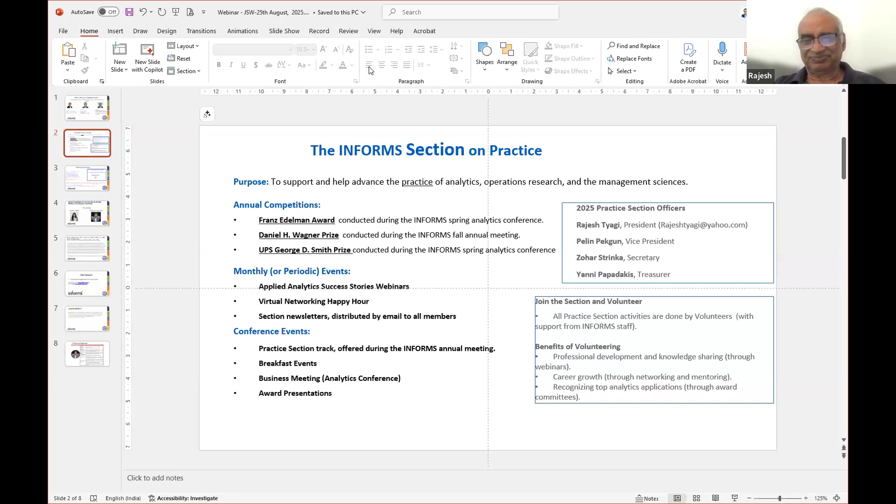Thanks, Rajesh. So we have started this OR practice core team, ORSI practice core team, which is a mixture of academicians and practitioners, primarily with a practice focus. We have several people in our team, now about 22 people, with myself as ex-IIMA retired faculty, and I have worked in Tata Steel long time back.

Then you have Sanjay Kumar Prasad, Dr. Siddharth Sengupta, ex-TCS and IIT Bombay, Sankarsan Basu, ex-ICICI and IIM Bangalore faculty, Bodha Ramkumar from Swiggy, Sundaravalli Narayanaswami, IIMA faculty currently, and Sumita Sharma.

We have started this practice prize competition, an event which we actually do at IIMA every year. Last year we started jointly with IIMA, before that we had done it only with ORSI. So IIMA, ORSI, Center of Data Science and Analytics of IIMA and ORSI do this national practice prize competition. This year we received 19 entries, out of which 6 will be selected. The selection process is going on, so I cannot tell anything more about that. But the final selection process will happen on 11th January 2026 at IIM Ahmedabad.

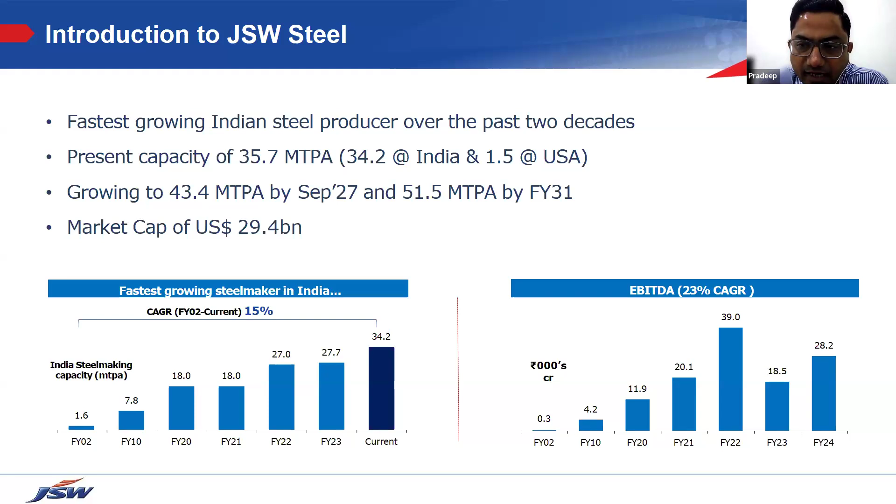About JSW Steel: it is a fast growing steel producer with a present capacity of 35.7 million tons per annum, the largest steel capacity in India by an integrated steel maker. We also have a plant in the USA with a capacity of 1.5 million tons. We plan to grow to 43.4 million tons by September '27, and 51.5 million tons by financial year '31. Present market cap is $29.4 billion. It's a large organization, so whatever small change we make in the process—even if we save just 1 rupee, multiplied by 10 million, that's a saving of 1 crore rupees yearly. So we talk about very small improvements, digitizing to get standard benefits, and the benefits are huge because of the volumes.

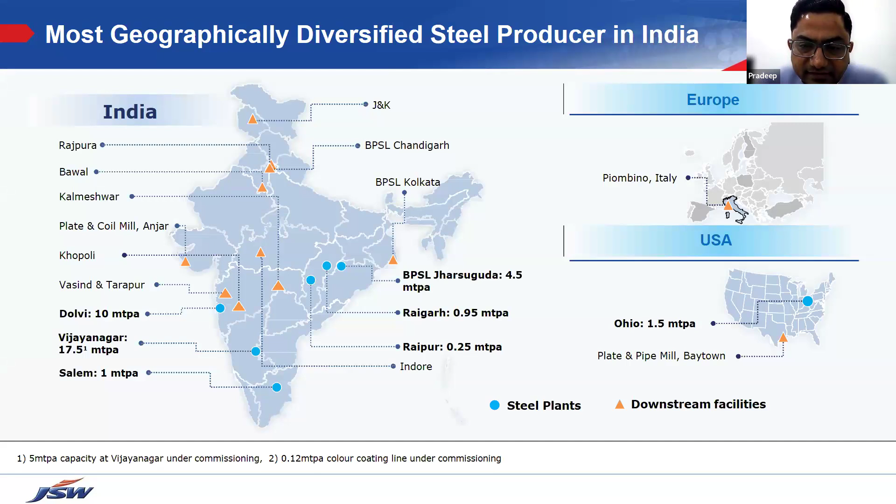Steel, now we have 6 integrated steel locations across India and 1 in USA, which is in Ohio, where we use raw material to produce steel product. And then we have downstream locations, more than 10 across India, to produce downstream products like cold rolled steel, coated steels, electrical steel, etc. So we are widespread across India, and globally we have mines and availability, our presence is there.

Steel is a basic commodity where we make multiple types of finished products. Our finished product is mostly the raw material for other industries, such as appliances to make the appliance, automotive to make the car bodies. So we produce the base steel and they in turn use it to make the final application. We are supplying steel to almost all known applications of steel, such as infrastructure construction, bridges, roads, consumer durables, pipe tubes.

Different types of steel products are also there in flat product and long product. Flat products like hot rolled plates and coils, cold rolled sheets, etc. Long product typically includes wire rod, TMT. So we are manufacturing all kinds of products which are used in turn by the secondary industry to make the end components.

As I said, making small changes gives a huge benefit, and digitization has helped us a lot. Now we are the lowest conversion cost steel industry across the globe. World Steel Dynamics has recognized this. This has been possible by continuous digital intervention in many of our processes involving manufacturing, supply chain, mining, sales, marketing,

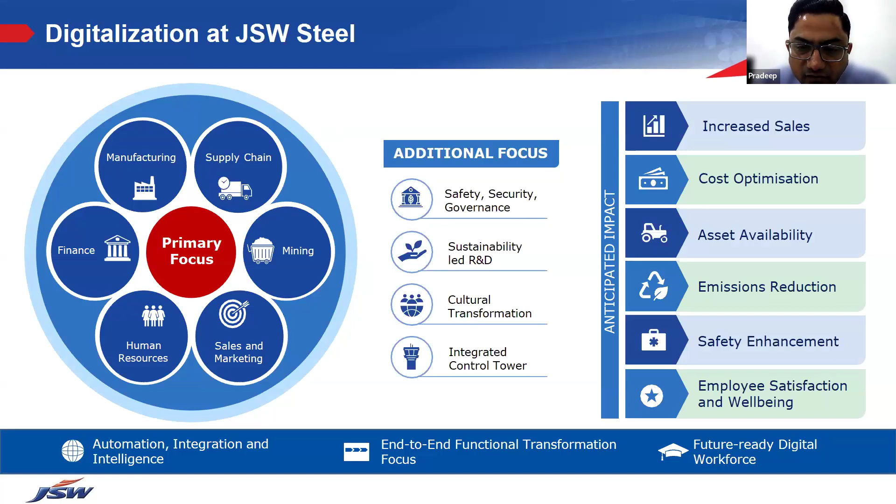human resource, and finance. We have a vision to go to Industry 4.0, where, although it is a labor intensive industry, our objective is to make it more smooth and sustainable and have a visualization for faster and smooth decision making. So we have made small cells for improving or introducing digitization in every activity we are doing. The major focus is on automation, integration, and intelligence, end to end functional transformation, and being future ready for the digital workforce.

Coming to the project focus, now we will talk about the business challenge. Before talking about the business challenge, I will introduce how the steel is manufactured.

So first, we have raw materials. For us, the raw material is iron ore. To produce steel from iron ore, we use coal and coke. They are the reducing agent. Iron ore is something like iron oxide, and we need to remove this oxide from the iron by melting. So this fuel acts in two roles: one is to give us heat, and second is to reduce that iron ore to iron. Then fluxes are added to get the desired composition and activate this process.

So these raw materials first get beneficiation to upgrade the quality, because nowadays in India we are not able to find very high grade iron ore. So we have to use low grade iron ore by putting it through a process where we upgrade the iron value and get the desired concentrate or agglomerates. Agglomerates are like pellets and sinters. These agglomerates are then charged into iron making units.

There are two types of iron making units, Corex and blast furnace. Blast furnace, being our largest unit, gets the feed of pellet, sinter and coke with the fluxes. Then it melts everything, separates out the oxide in the slag, and metal is made. We call it hot metal. Now this hot metal goes to the steel making unit, which does hot metal pre-treatment to remove some of the impurities.

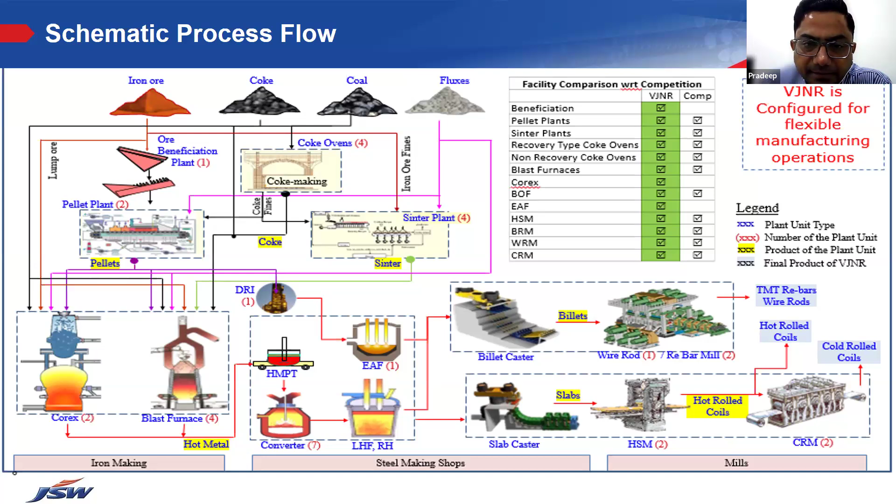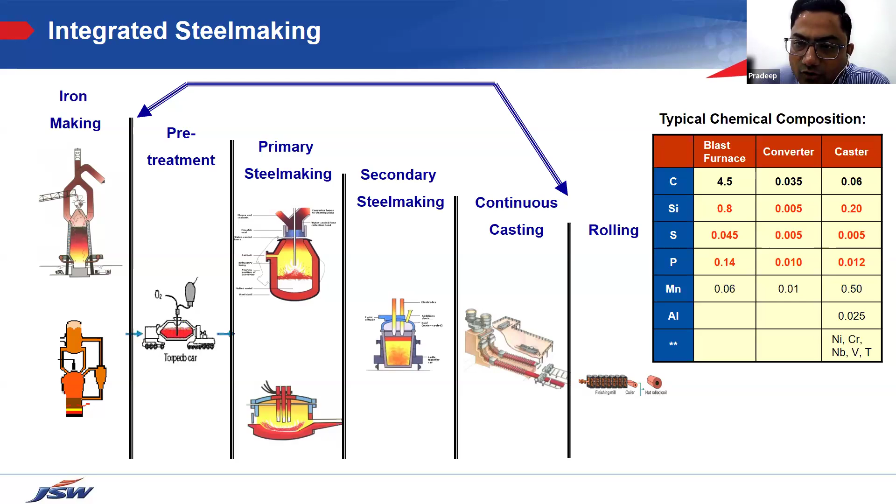We put lot of oxygen in flow and then we burn this silicon into silica by the same oxygen. We reduce the sulfur and phosphorus by adding additives and fluxes, and manganese is also reduced. After that, in the caster, which is the final steel making process, in between converter and caster we add ferroalloy to get the desired composition.

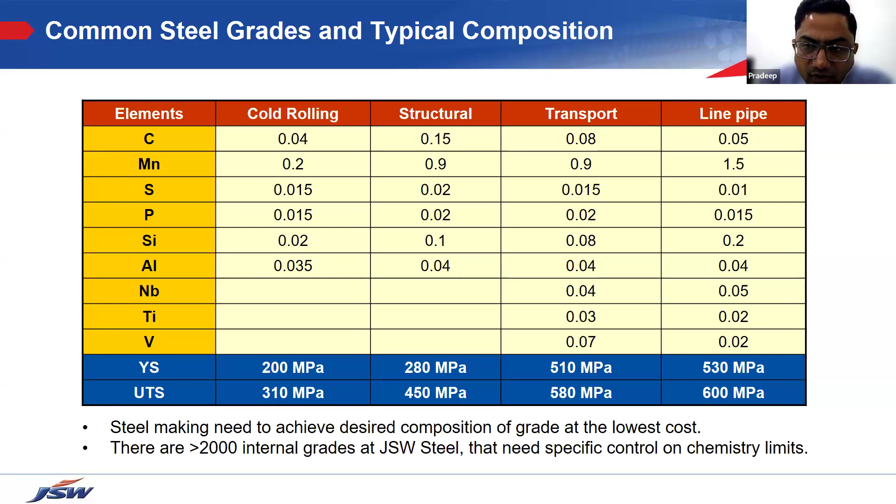Based on the final product requirement, let's say we have more than 2000 internal grades which have specific chemistry requirements. So for each specific chemistry requirement, there is a different combination of ferroalloy that we charge. For example, 4 types of product: one is cold rolling, where we need low carbon, low manganese, so less amount and low strength. Ultimately, the purpose is to get either the desired strength or a desired functional property in the finished product, and accordingly the chemistry is decided. This is an example of how chemistry and strength are linked. If we boost the chemistry higher, typically the strength goes up and we need more ferroalloy. So depending on the grade requirement, the ferroalloys are being added.

Now why do we need a model? For each ferroalloy there are multiple options. For example, we can get the same manganese of 0.1% if we charge low carbon ferromanganese, medium carbon ferromanganese, metallic manganese, high carbon ferromanganese or silicomanganese. So the operator has the option whether he wants a high cost material or a low cost material. For the same 0.1%, if he uses high carbon ferromanganese, the cost is only 131 rupees for each 0.1% chemistry addition, while if we use metallic manganese, the cost is 269 rupees. So the selection of the right ferroalloy based on given operational conditions is a must requirement for overall optimization of the ferroalloy cost.

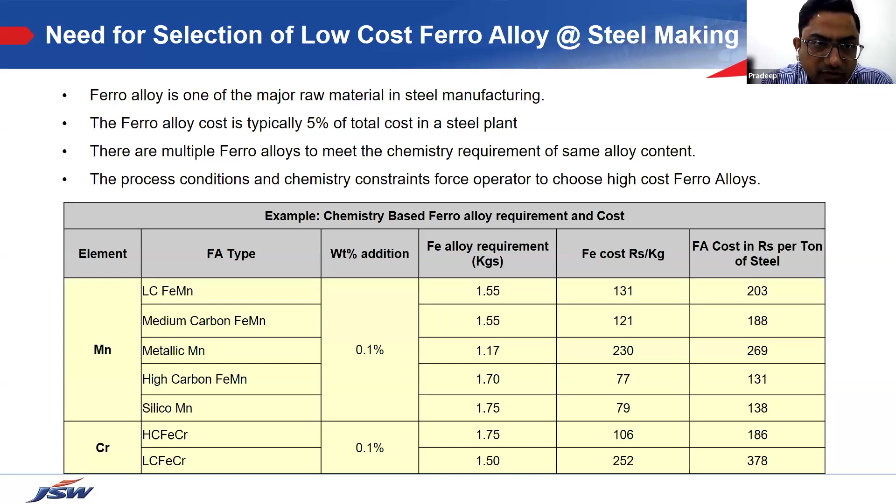This model talks about how we optimize this. Since steel making is an ancient process, people have been doing this, so mostly it was driven on an experience level. Now we are having a data driven process to have automatic selection for the method of adding ferroalloy and sequence. So this is about the basic overview.

Earlier also there was some optimization, but what we have done now is we have integrated the optimization across the value chain. For example, if we have a lot of variation in the raw materials which are iron ore, coal, coke, etc., this variation gets transferred to the hot metal, leading to large variation in hot metal chemistry. So one of the challenges is how to handle different incoming compositions.

Second challenge was how to handle process abnormalities or process conditions to align with the ferroalloy requirement. All the time we cannot charge the low cost ferroalloy because the process is not favorable to us. So what are the variations we are getting, what are the dynamic constraints? The bath condition is difficult to predict, for example the oxygen level and temperature.

There can be delay in the test results. We do not know dynamically what is the exact composition in the metal or slag. So there is a need for identification of chemical composition of each element so that the operator does not wait for the test result, he directly does something.

And then there is a productivity focus. We may not have sufficient time to take decisions if we wait for the right samples. There can be communication gaps because multiple operators are involved. There are dynamic conditions, high productivity mill is there. There can be some communication gaps, and if the right ferroalloy is not available, then he will charge whatever is available, the high cost one.

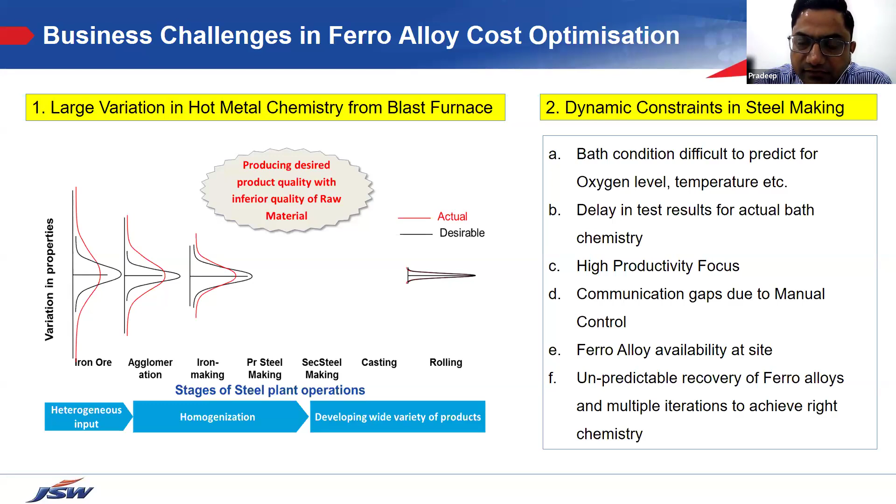Coming to the solution approach: as I was saying, there is process variability for bath oxygen, how much oxygen is left before adding the ferroalloys. If more oxygen is left, then ferroalloy recovery will be affected.

Ladle time, how much time we are putting for dissolving those ferroalloys and making it homogenized across the bath. What is the temperature? Temperature plays a crucial role in deciding suitability for the next station, whether we are re-arcing for the temperature. If we re-arc, then the chemistry gets disturbed. Similarly, what will be the sequence of addition, whether we are adding high cost ferroalloy first, low cost later, dissolving, all these things. Then loss, how much is getting lost in the slag, what is the impurities in the final steel.

So this is from the recovery front. For the cost front also, there are some consumables considered part of ferroalloy or total cost, like aluminum consumption to annihilate all the excess oxygen, lime consumption to prepare a required slag quality or chemistry to get better inclusion cleanliness, clean steel, and synthetic slag if we are using it for getting clean steel again.

Then difficulties in operation are like data accuracy, manual adjustments are there, all the things may not be recorded, so people do manual adjustment to match the stock. There can be chemistry deviations because we are not able to hit the right chemistry on the first go, so we wait, reiterate and do manual additions till we get the desired chemistry. So all these process variabilities are there.

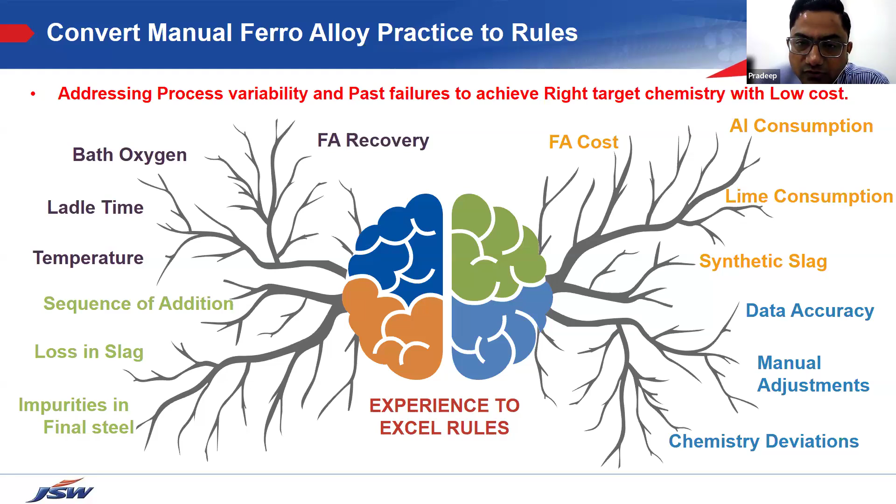The first objective was to convert manual ferroalloy practice to logic and rules. So this is how we started developing the solution.

In 2014 we combined the logic and operator understanding on basic rules that was converted into Excel. Then in 2016 some missing data was there, load cells not there, we were not able to know the exact usage of ferroalloy or the ladle weight. Then we contacted a third party, a prestigious third party, to develop the model.

They did develop the model, and similarly another third party we had to contact in 2020. But the problem was that these third parties were coming and discussing with the top management, the managers. These managers were agreeing with them because it was logically right, but the operators were not agreeing, their experience was not matching. So, to understand them well, both these third parties could not deliver a solution that the operators were accepting. So finally we decided to go by our own.

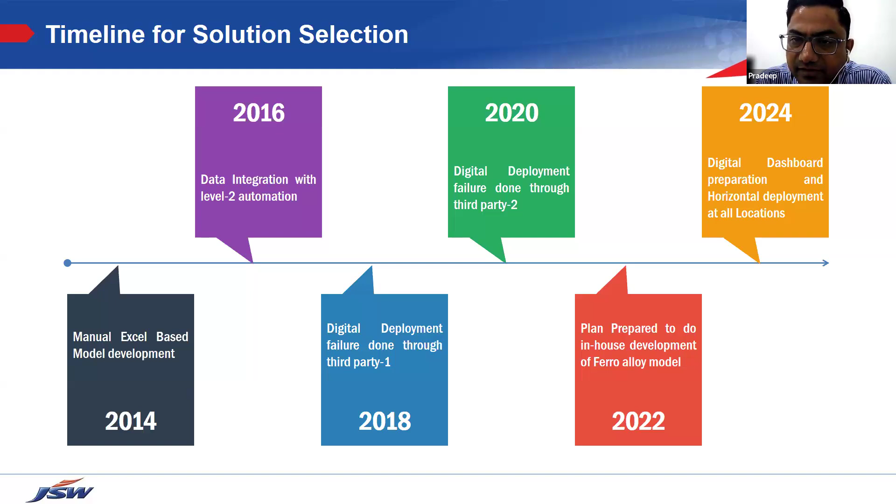We discussed with the operators and asked them to give us all the input. Then we developed a basic ferroalloy model and deployed it ourselves in a digital dashboard form, which we also monitor.

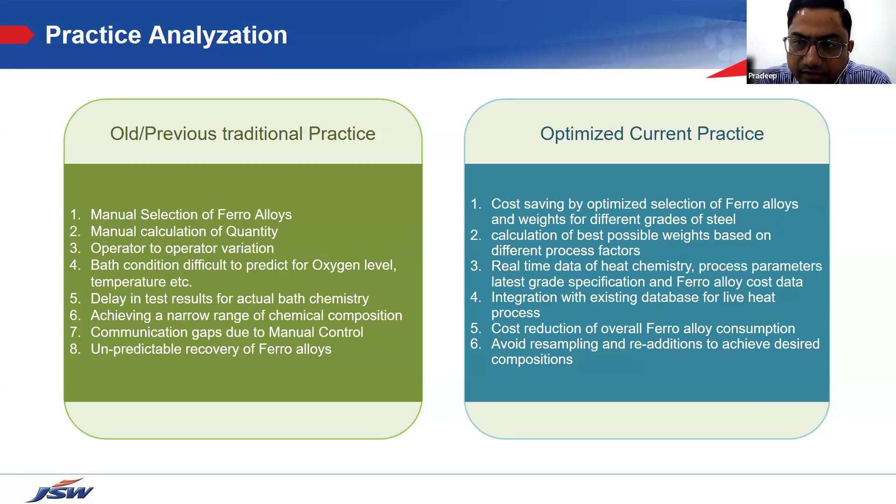As I already said, there was an old practice where everything was manual, with errors, delays, and chemistry deviation, which is loss of quality. This new practice could deliver optimized selection of ferroalloy, the best possible weight in each different process factor, real-time data for heat chemistry process parameters, integration with the existing database for live heat process, cost reduction, and avoiding the resampling re-addition to desired compositions. Now I will request Janaki to continue.

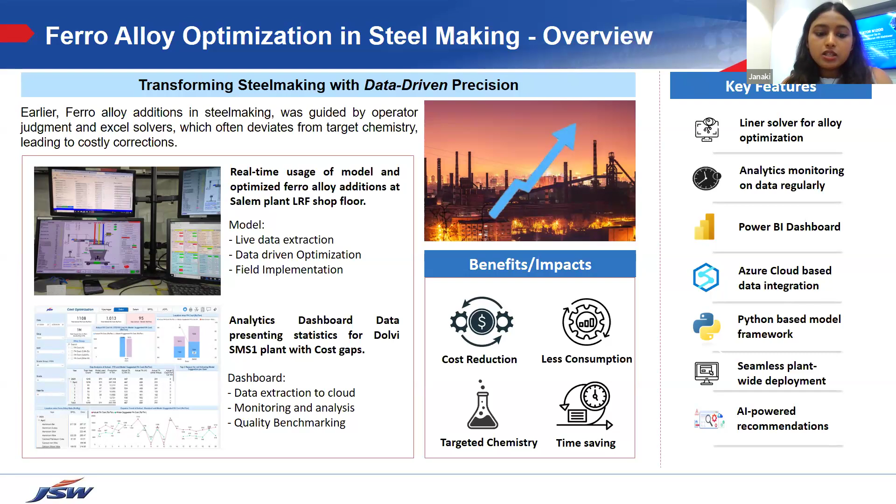So let's go to the technical approach now. As I mentioned, this optimization engine works on a linear optimization programming framework. This solver minimizes two things: first, the overall ferroalloy cost, and second, the deviation in carbon and silicon chemistries. The model takes inputs such as initial steel chemistry from level 2 systems of our infrastructure, then recovery rates of each alloy, target chemistry, and availability of ferroalloy cost on a real-time basis.

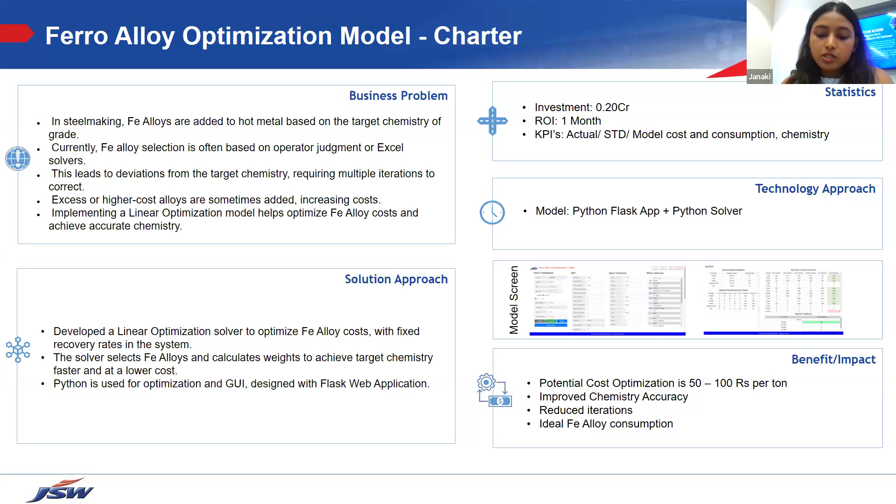Based on these inputs, it computes the exact quantity of each ferroalloy. If any ferroalloy is unavailable, the solver automatically adjusts the mix, choosing the next best alternative within the cost and chemistry constraints. Unlike machine learning, which requires large historical data sets, this linear optimization solution provides a deterministic, globally optimal solution, making it reliable and scalable across different plants.

And then there's the output layer, which is displayed using Flask UI and suggests the alloy additions according to the weights and available ferroalloys. The system is also connected with an Oracle database for process data and costing inputs, while Azure Synapse handles ETL pipelines to clean and standardize the information.

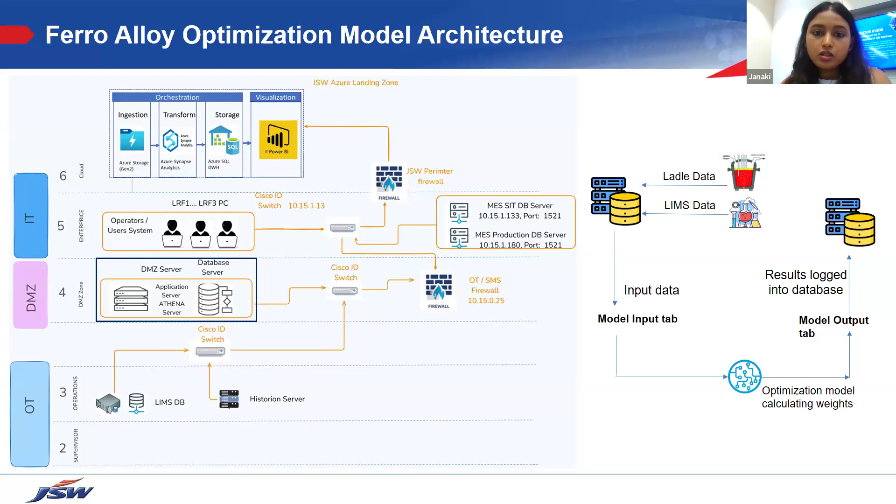Then they have to make changes accordingly if they need to add a certain variable, like we have here for silicon and manganese, where they back-calculate and put in the value. Then they refresh the model and get the output data. You can also see a screen where you can select or deselect a particular ferroalloy. If, for that ongoing heat and grade being produced, a particular ferroalloy is not available, the operator can uncheck it and the optimization model will run accordingly.

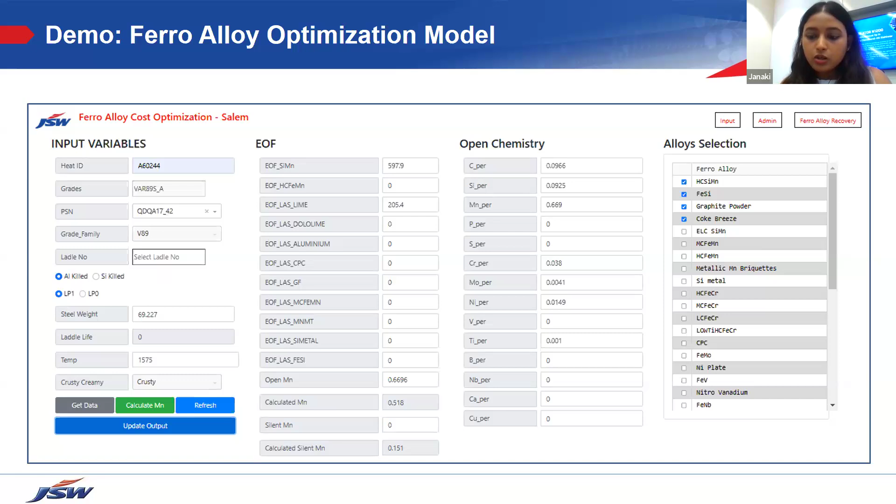What was the initial chemistry of that particular heat, we retrieve from the database, and then the model calculates values according to the weights it has recommended, basically in kilograms. We can check that it usually targets the lower end of the specification, meaning it targets the minimum side. So then you can check what your aim is, and accordingly the additions are done by the operators.

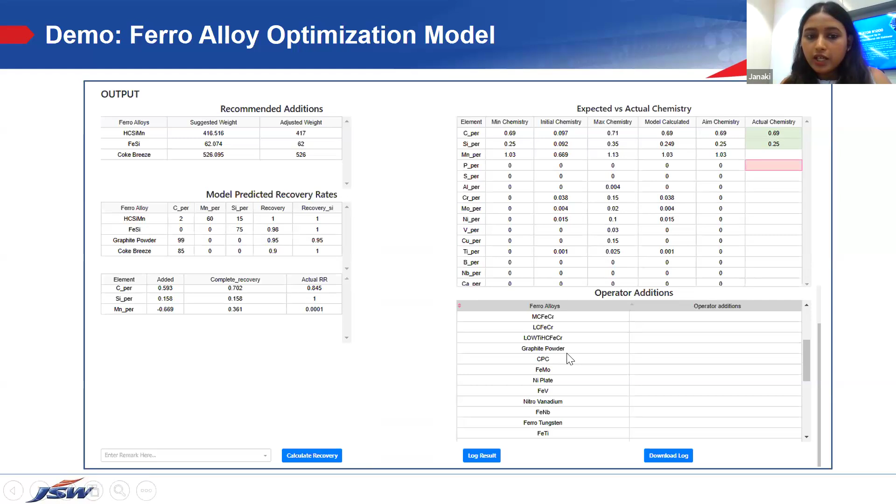Next we'll go to the dashboard implementation part. For the dashboard, after all the model process was done, there was a need for analytics too, to monitor the previous data we are producing heat-wise and see where we can make more improvements.

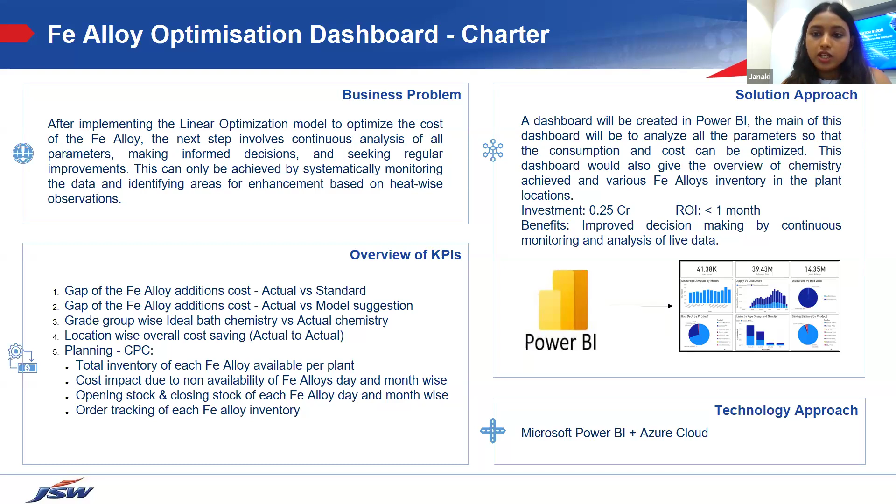On this dashboard, we developed it on Power BI using Azure services. We collect all the data from the OT network, bring it to the IT zone through SHIR, which is self-hosted integration runtime. From there, we pass the data into Azure cloud. We have storage there, and then all the ETL pipelines are created, and we take this data to the dashboard.

Okay, so let's go to the architecture. This is a high-level architecture of the Ferro dashboard. We collect data from different data sources, which is Excel, Oracle, SQL for live data, and SAP for inventory and cost-related records.

Then it is integrated with the Azure infrastructure. Azure Synapse Analytics performs the ETL process: extract, transform, and load. Cleaned and standardized data is stored in the Azure SQL database, and then from there we take the inputs to the Power BI dashboard, where the reports have been generated.

So this is the current dashboard. I am showing you this data for Dolvi plant for SMS2 location. As you can see, we have one single platform for all the plants.

From these plants, you can select multiple plants as well, or select data for only a single plant. Then you have to select the shop, meaning steel melting shop. For Dolvi, there are two, SMS1 and SMS2. So you can view it overall, or plant-wise.

There are some other filters also for analytical purposes, like you can go from heat, shift, grade, till the heat level. And there are multiple KPIs that you see on the dashboard right now.

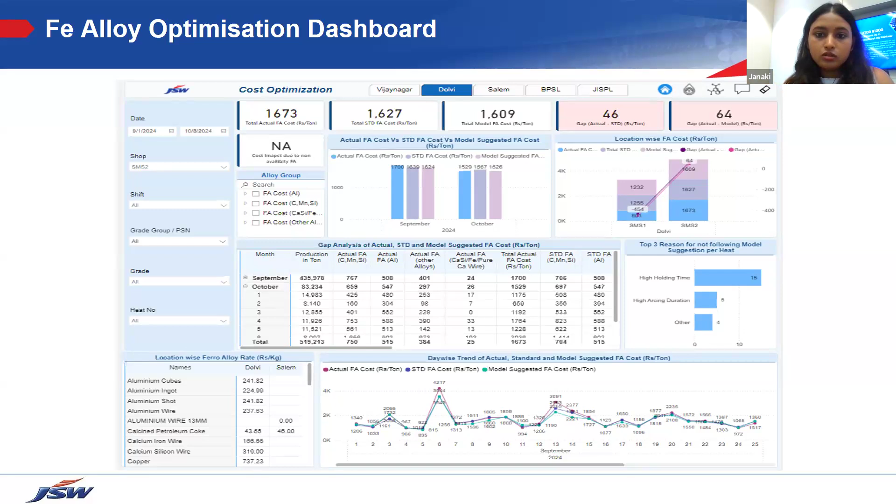So how does the monitoring part go? Let's explain. The monitoring method in a data-driven and AI-enabled environment: each heat is analyzed for cost deviations.

Then in, sorry, just a minute.

As I was explaining, each heat is monitored according to the deviations, and this deviation is then calculated in rupees per ton, based on whatever consumption has happened.

Then we go to the dropdown for root cause analysis, which allows operators to tag reasons such as recovery variations, temperature loss, or alloy unavailability. The system learns from historical patterns, building a knowledge base of preventive actions. This allows future heats to benefit from past lessons, making the process self-improving over time.

If I talk about the benefits from this monitoring, there are tangible solutions we have, like cost reduction of around 30 to 40 rupees per ton of savings across all the locations, whereas earlier this KPI was around 150 rupees per ton. That gap was seen between the actual and standard ferroalloy cost.

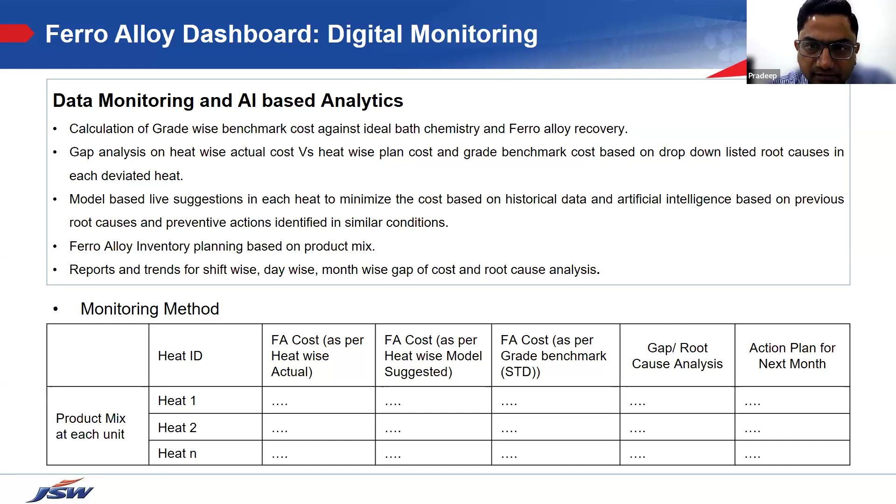Janaki, you are on last slide, right? It's not moving Yeah. slide. Just come to the next last slide. Okay. Yeah. Okay. Yeah. No, Okay. After this. Yeah. Okay. You can explain this.

In this slide, you can see the tangible benefits also, from data we calculated for 2024. As you can see, from the Dolvi plant, we have around 118 crore of benefits till date, till October 2024, and the other plants are also visualized here.

These were the intangible benefits I was talking about, the quality and standardization process that goes on in JSW. So, my last slide.

Let me talk about the cross-industry relevance from this. This solution that we implemented is not only restricted to the steel plant we were talking about. This is one problem we tackled through this solution.

So overall, if you see, it is particularly a cost reduction and consumption reduction optimization solution. These solutions can also be implemented in different verticals like supply chain, energy, retail, and healthcare. There are other use cases we can go through, but these are the major use cases where the optimization could work, giving out the specific benefits.

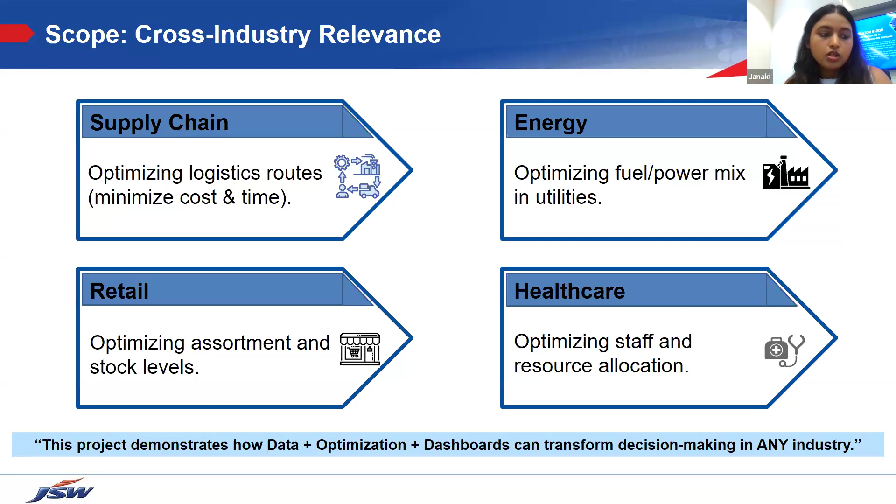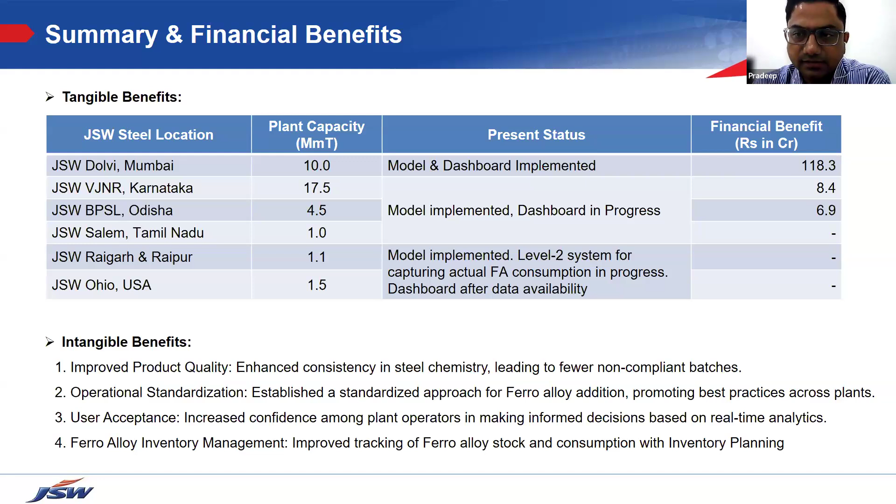So now I'll hand over to Pradeep sir to give us concluding statements on the overview of the project. Okay, I think this part is done, so we are open for questions. Thank you.

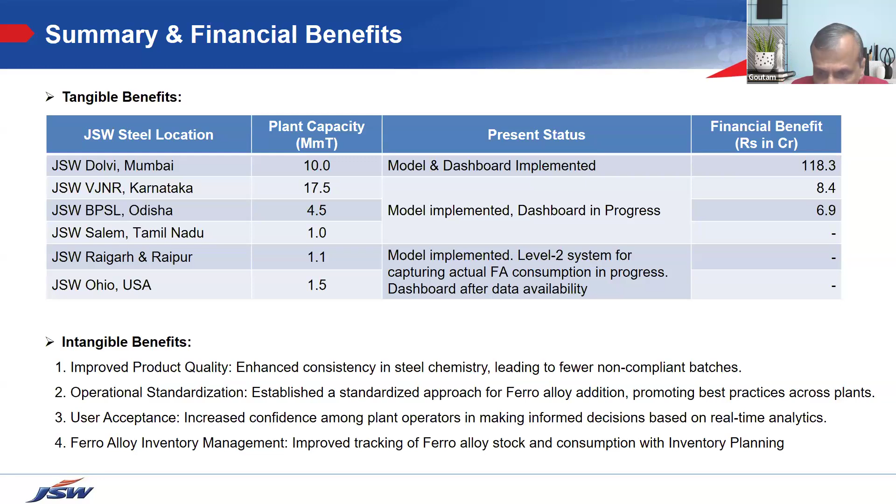Whatever your question is, you can ask live, and Pradeep and Janki will answer live. You can unshare screen, Janki. If the question is specific to a screen, we'll give the slide number. I don't think people can ask questions directly - I think they need to enter it in the Q&A, they're not allowed to ask questions live. Okay, Pradeep, you already answered a couple of the questions. Can you just repeat those questions and speak them out, because not everybody will have access to those.

So there was a basic question, what were the equations used? We have used linear equations for most of the line items, but some line items have dependency on process conditions. There we are using some artificial intelligence models using Python, and those equations we use to process optimize, because they are the resultant of process conditions like aluminum consumption, slag consumption, calcium consumption. So for those we have a non-linear kind of model, but most of the line items, like standard ferro alloy, we have a linear model.

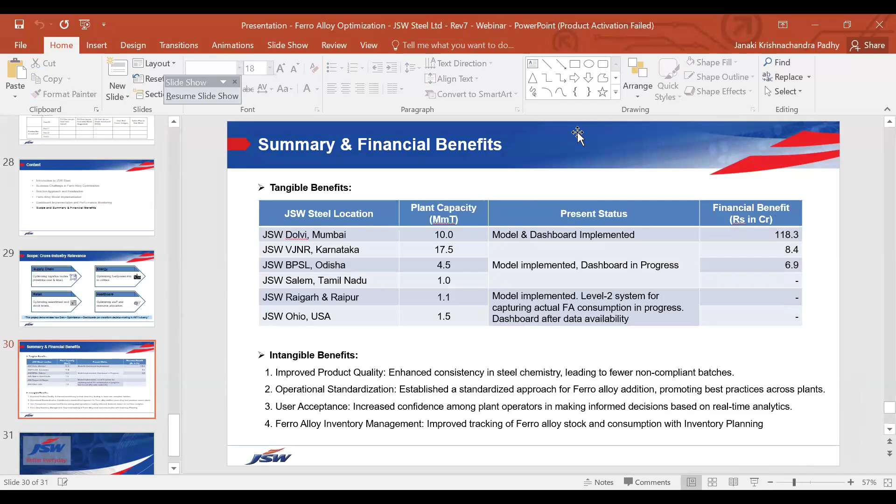My second question is that you brought in two third-party model developers or solution providers, and then you went in-house. So what I'm understanding is obviously they were experts in their field, but there are some components that miss. All of us here will be some sort of OR specialist, but there are human factors and organizational factors which sometimes experts miss. So what would be your suggestions to look out for when going from mathematical to practical solution development? What should we avoid?

The first thing I feel, because I worked with those third parties, is a data accuracy concern. For any industrial process, whatever data we receive is not in the right analyzable way, and there are human factors affecting the data. There were consolidations in the data - like somebody with a target to maintain a certain ferro alloy cost would do consolidation, or if there's a stock mismatch, he would do consolidation. Those consolidations were giving wrong input to the next team for digital analysis. When they analyzed digitally and came out with a solution, that solution had errors because the input data was not rightly filtered. That was the first challenge - they could not give a solution acceptable to most of the heats, only to some of the heats.

Second thing is the operator doing this should be taken into confidence or consulted - he should feel that he is being valued. When that happens, only then does he accept and move forward with the next level of trial and validation. So these two things - data accuracy and operator confidence - if done properly with those third parties, we might have made the model work in the first trial itself.